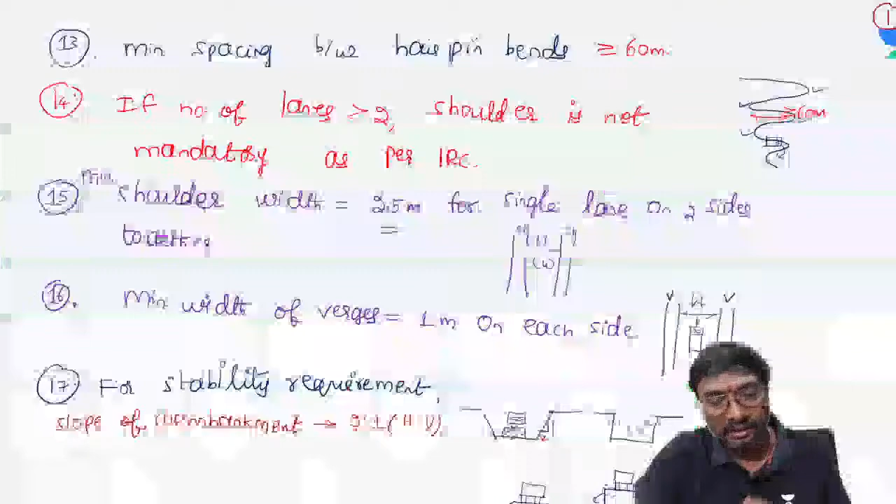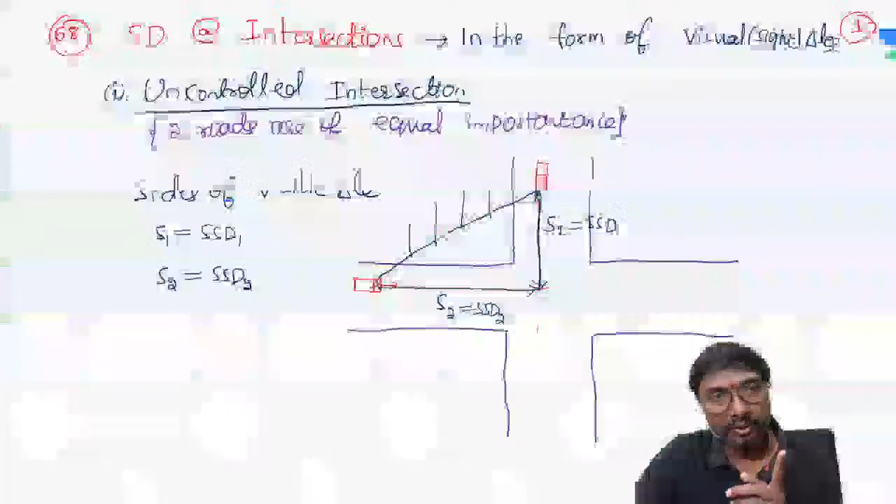So these are all completed now, the geometric design of the cross-sectional elements and everything. Which one? These highway visual aids, right? Geometric design of highways: stopping sight distance, chapter 2, is over. Chapter 3, overtaking sight distance, over. Chapter 4, visual aids, also over. If you just observe, these are all the things. Chapter 4, intersections, visual aids, and the occlusion zone, we have done.

Right. So today we'll be starting chapter 5. Lecture 7 of the quick revision of highway engineering, that is horizontal alignment part 1. So chapter 5, horizontal alignment, horizontal curves. Horizontal alignment means these are located in a horizontal manner only, yes or no?

Is the alignment located in the horizontal plane or the vertical plane? The alignment is located in the horizontal plane, obviously. Now we'll be going for horizontal alignment. First we'll be going for horizontal curves with superelevation.

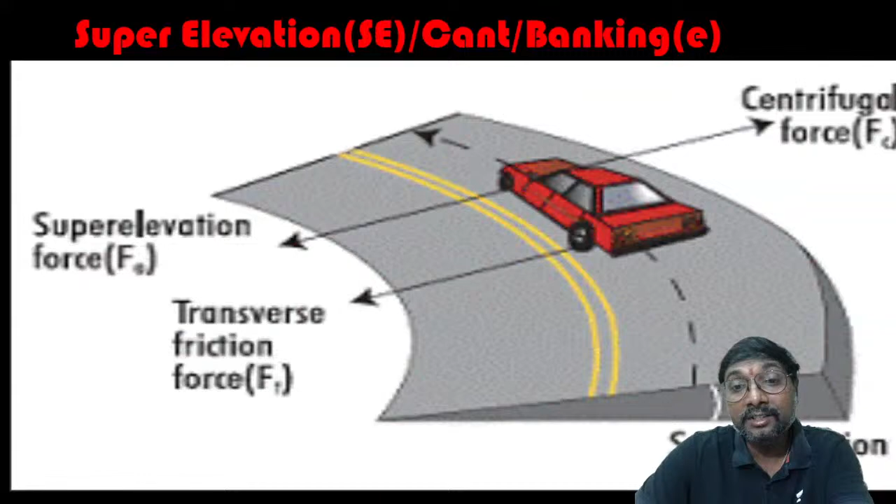How many formulas are over? The 75th formula is over now. Now we'll be starting with the 76th formula. So 76th: the condition of a vehicle on a horizontal curve. What is possible? Tell me.

Condition of vehicle on which curve? Condition of vehicle on this horizontal curve, right? Suppose P by W. What is that P by W? You can say that P by W is nothing but your centrifugal ratio. Yes or no? P by W is nothing but your centrifugal ratio, if you just observe, right?

So the centrifugal ratio, or you can also call it as which one? This impact factor. Centrifugal ratio, or you can also call it the impact factor, right? Centrifugal ratio means the ratio of the centrifugal force and the weight of the vehicle. If P by W is greater than F, which friction you will be having? Lateral friction only you will be having.

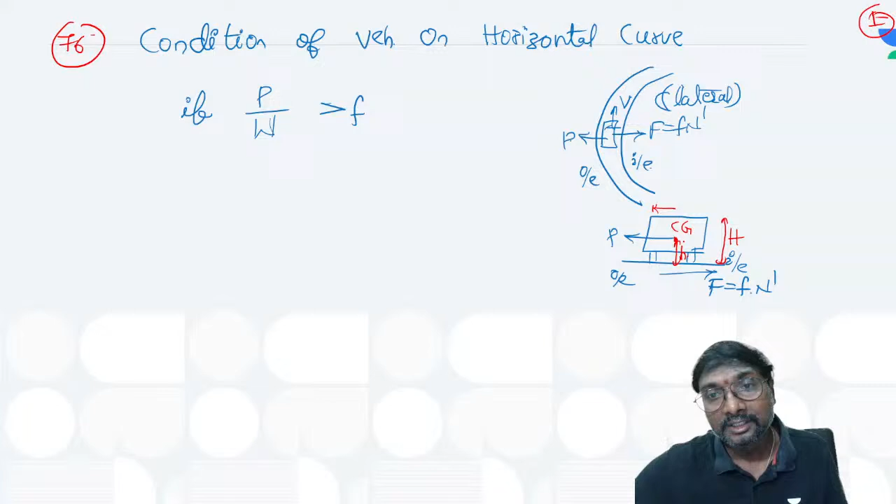Now what is this value? This is your capital H, total height of the vehicle, and this is the CG of the vehicle. This is your small h, the CG height. And small b will be your width of the vehicle.

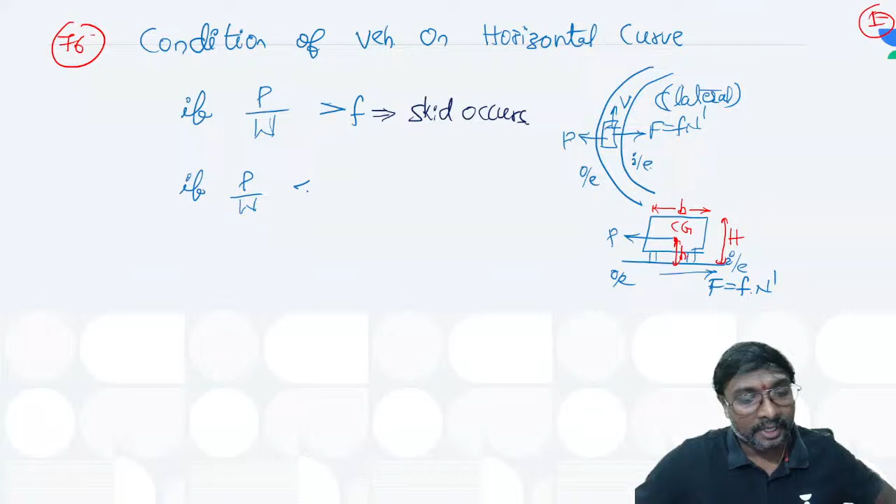If the P by W effect is greater than F, the effect is higher and the resistance is lesser. What will happen? Skid occurs definitely, unsafe. Similarly, if P by W is lesser than F, it is safe in skid. Which skid? Obviously, this is your lateral skid. On the horizontal curve, the skid is a lateral skid only; there is no longitudinal skid.

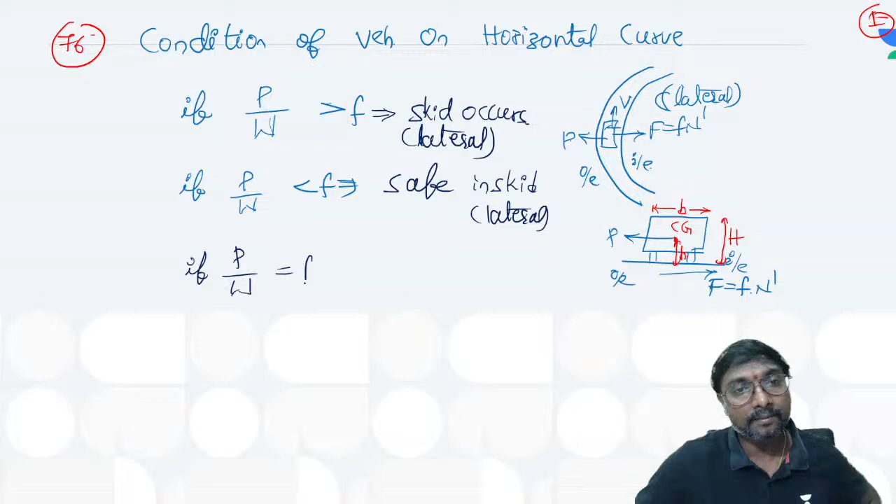Now, suppose P by W is equal to F. What is it, you can say? This is in the equilibrium condition, if you just observe. Now, this is with respect to the condition of vehicle on curve with respect to skid.

Now, similarly, what is another condition of the vehicle that will happen? Tell me. What is another condition of vehicle?

H curve means it is your horizontal curve only. So which parameter will we be taking? Overturning, not overtaking. Lateral skidding and this overturning rate, both parameters will be there. Yes, we have to check both the parameters, right?

Suppose P by W is greater than b by 2h, lesser than b by 2h, and equal to it. We have to check these three conditions definitely. If P by W is greater than b by 2h, what can you say? Overturning occurs or it is safe in overturning, tell me.

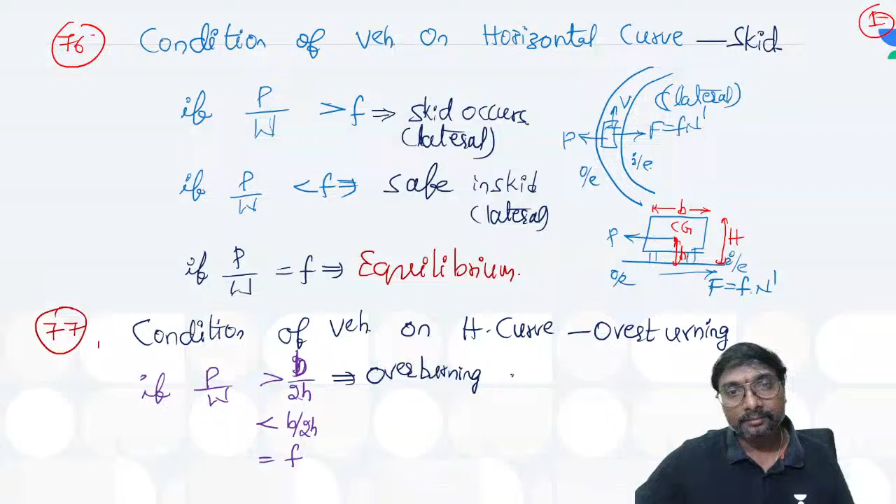Overturning occurs, right? If P by W is lesser than b by 2h, what can you say? It is safe in overturning, right? Now if P by W is equal to b by 2h, under which condition is it? It is under the equilibrium condition, you can say. Got it?

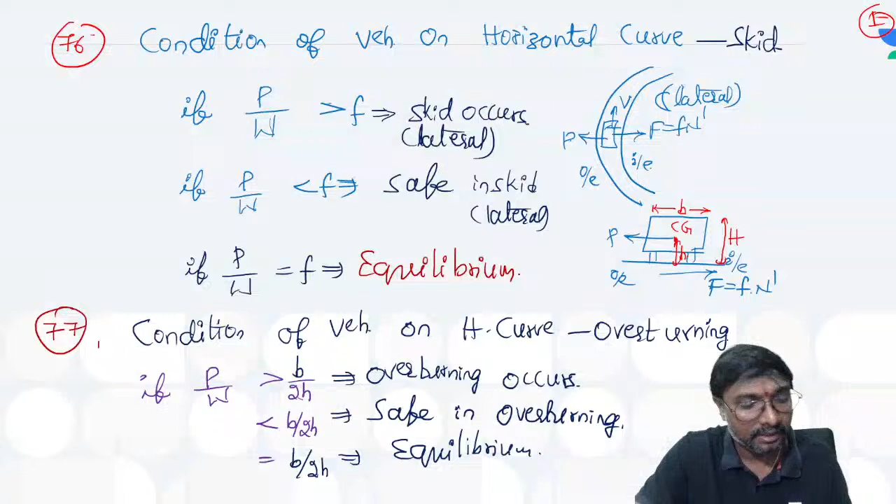So what is the meaning of equilibrium? Equilibrium means exactly neither failure nor safe condition. If the effect is slightly greater, it will go to the unsafe condition. If the resistance is slightly greater, it will shift to the safe condition. Is it clear, everyone? Shall I move to the next one?

Not only individual effects, we can have the combined effect also. So what is that combined effect? If P by W is greater than f and lesser than B by 2H, which condition will occur? Only skid occurs, you can say.

Suppose P by W is lesser than f and greater than B by 2H, what will happen? Lesser than f means the frictional resistance is higher, so no sliding or skidding will occur. But the B by 2H resistance is lesser and the effect is higher. So only overturning occurs, right?

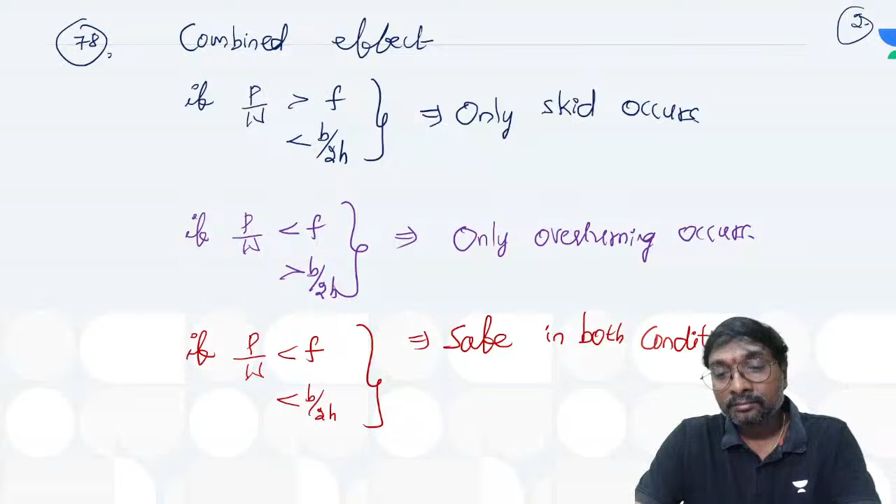Suppose P by W is lesser than f and lesser than B by 2H, what can you say? It is safe in both conditions, overturning as well as skidding. Absolutely, right? Got it? Clear?

But is it compulsory that it will always be safe in both conditions? Sometimes it may not be. Now in this condition, P by W is greater than f and greater than B by 2H. Which failure will occur? Both will occur. So is it safe in both or unsafe in both? It is unsafe in both conditions, you can say.

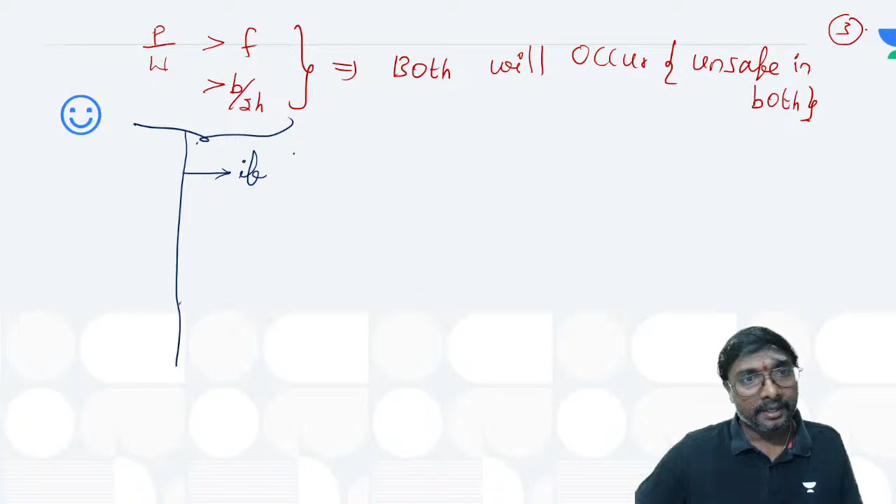But which one will occur first and which second? Under this there are three possibilities. The first possibility: if small f is lesser than B by 2H, what will happen? It skids first and then overturns.

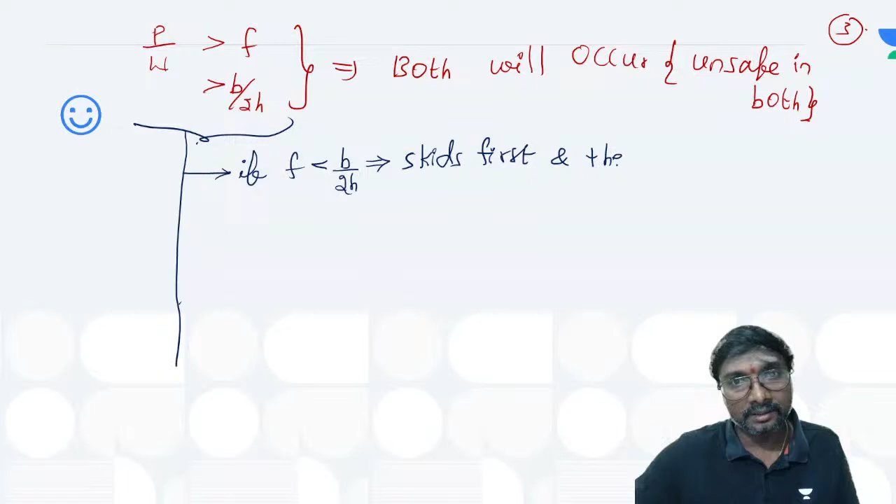So skids first and then overturns, you can say, right? Skids first and then overturns, right? Why will it skid first? Bhale Babu of engineering.

So here, f is lesser than b by 2h, lesser than p by w, no? Is it or no? So the effect is very much higher, so that both will occur.

But that skidding resistance is very much lesser compared to the overturning resistance. So it will be subjected to failure in which condition first? It is weaker in both and much more weaker in the sliding, because the skidding resistance is much more lesser, very much lesser. It is weaker in both and weakest in the skidding. Got it? Now if f is greater than b by 2h,

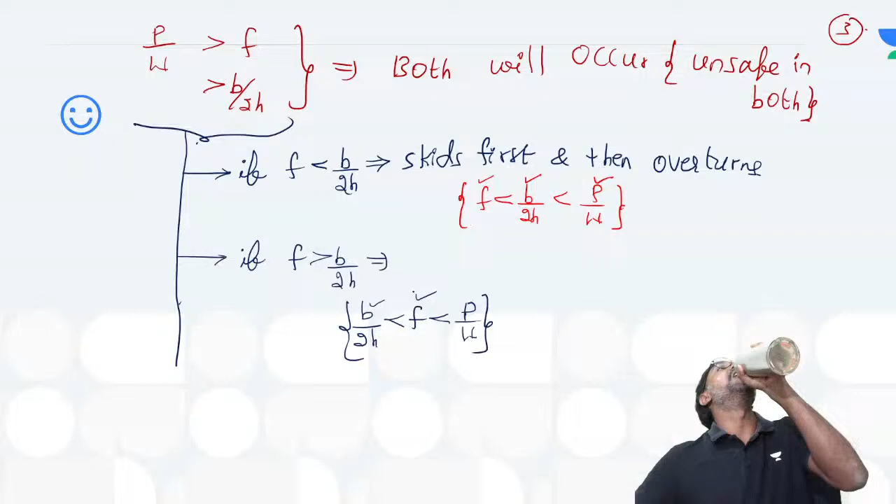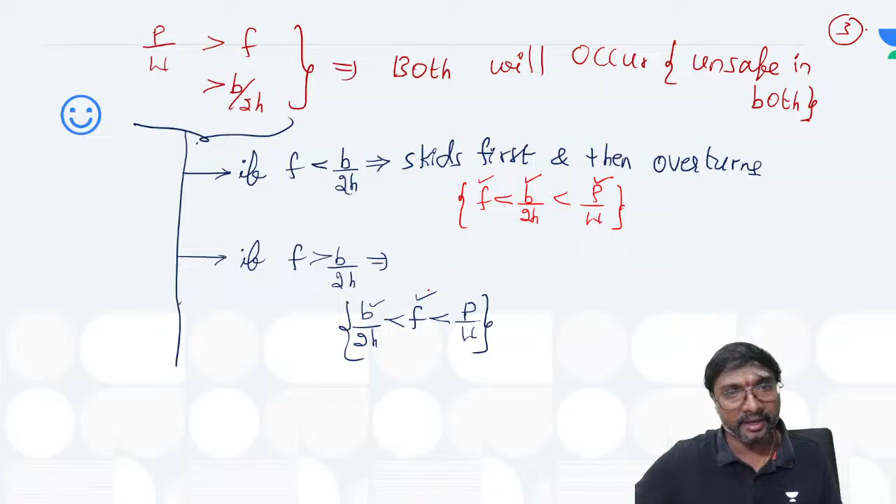It is weaker in both, but weakest in which one? Much more weaker or weakest in which one? Overturning, because that resistance is further lesser. So it overturns first and then skids, na? What will happen first, if you just observe? It will be subjected to overturning first. So no, it overturns first and then skids. Okay.

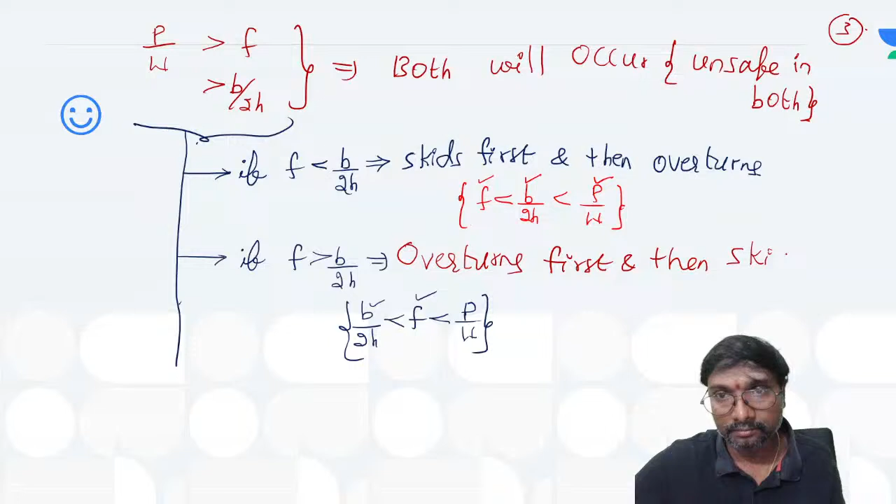Suppose under these conditions, if f equal to b by 2h, what is it you can say? That f equal to b by 2h, but both will be lesser than p by w effect. Now what will it result in, if you just say? Simultaneous failure, na? So it occurs simultaneously.

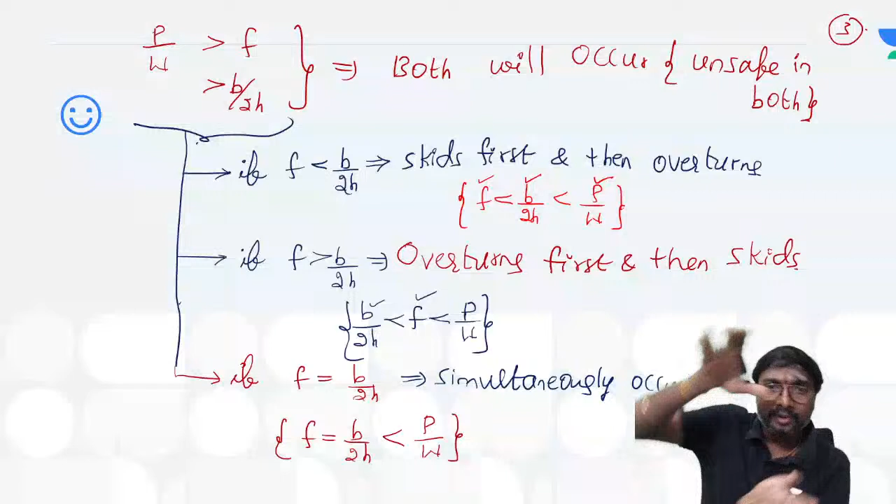Right, now tell me, among all of them, which one are practically possible and which one are theoretically possible? The first one, skids first and then overturns, means your vehicle will be skidding. During this skidding, vehicle velocity will be there, and because it is in contact with the road moving, so after that overturning it is practically possible. But once overturning occurs, you don't have any contact of this vehicle with the pavement, so no motion, no velocity is there, further skidding is not possible. Okay, is this practically possible or not?

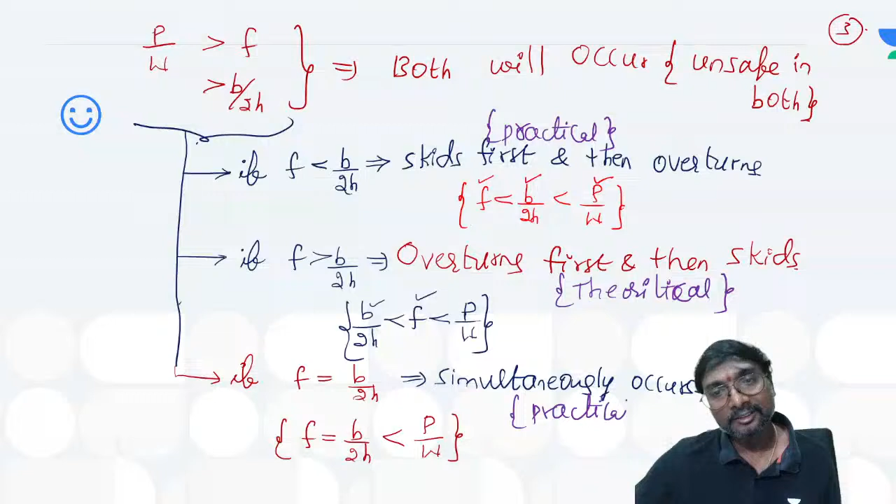Yes, this is practical, you can say. But this second one is only theoretical, you can say, right? But practically not possible. Okay. Next, this third one, right? You can say that the third one is practical, na? Isn't it? Third one is practical, you can say. We just observed it, isn't it?

Got it? Yes, now. So shall we move on to the next one? This is the condition we are having. Which equation is it? 77th point, or 78th point, na? No. Coming to this 79th point, right? What is that general equation of this super elevation, if you just observe?

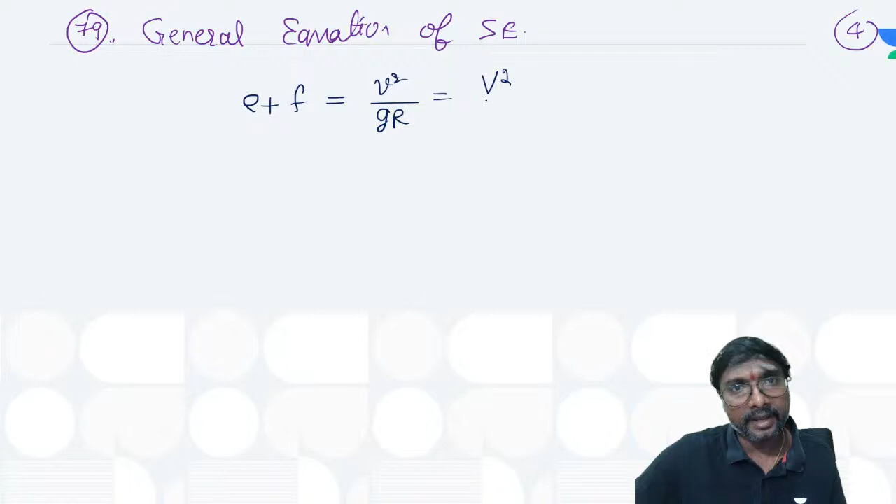So what is that general equation of this super elevation, if you just observe? That is your E plus F will be equal to, what is it you can say? That is small v square by GR, that is also equal to capital V square by 127R, na? That is small v square by GR, or capital V square by 127R, you can say, right?

So here, what is that G? It is in meters per second square, acceleration due to gravity, na? And R is the radius of this horizontal curve in meters, and small v is velocity of the vehicular design speed in meters per second, R will be in meters, and capital V, you can say, that is in kilometers per hour. So now that is your kilometers per hour, you can say, if you just observe, right? Is it not?

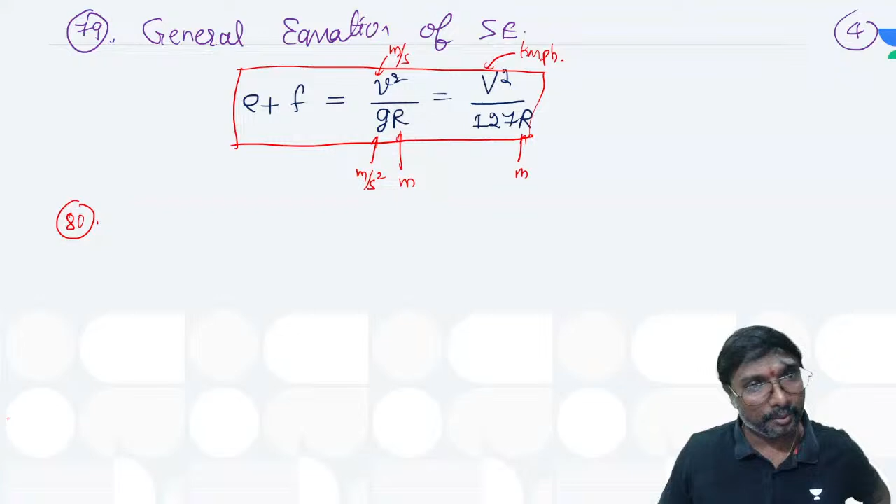That is the general equation we will be having. So now that is your general equation. First of all, what is the definition of this super elevation?

Super elevation, SE. You can also call it with which name? Banking - not state banking, online banking, offline banking, not banking like this. It is providing a bank, right? Banking or cant, you can say. What is the symbol we are giving for this banking or this cant?

Small e. So what is that small e? If you just observe, that is your tan theta, right? What is tan theta? Capital E divided by capital B, right? What is capital E? Level difference between the outer edge and inner edge. What is capital B? Width of this pavement, right?

Whenever you are having this road like this, let us say just for an example, centrifugal force P is provided in this manner, and this is your outer edge and this is your inner edge.

What is this level difference? That is your capital E. If you just observe it, this is your B, width of this pavement, right? This is your theta, you can say. And this is your vehicle running. So B is the width of this pavement, and capital E will be level difference between this outer edge and inner edge.

Yeah, Deepak, good morning. After long time, Deepak Pandey.

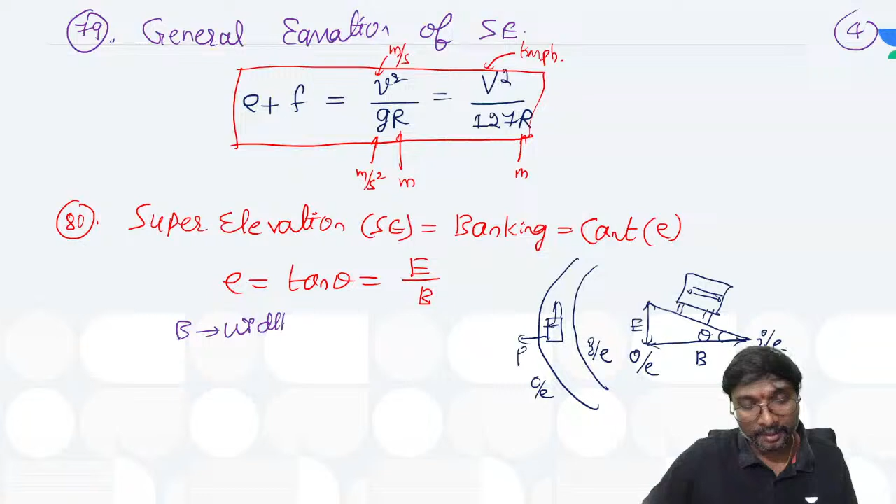So here what is capital B? You can say, if you just observe, width of this pavement where? Width of pavement on which curve?

If you just observe, yes, I am good. How are you?

Width of pavement on this horizontal curve. What is capital E? You can say that the capital E will be the level difference. Level difference between which one? Outer edge and this inner edge. Level difference between this outer edge and this inner edge, you can say, right? Got it? This is what you are having.

Whenever angle is given, how can you get that angle? Both acha hai, very good, very good. Keep it up.

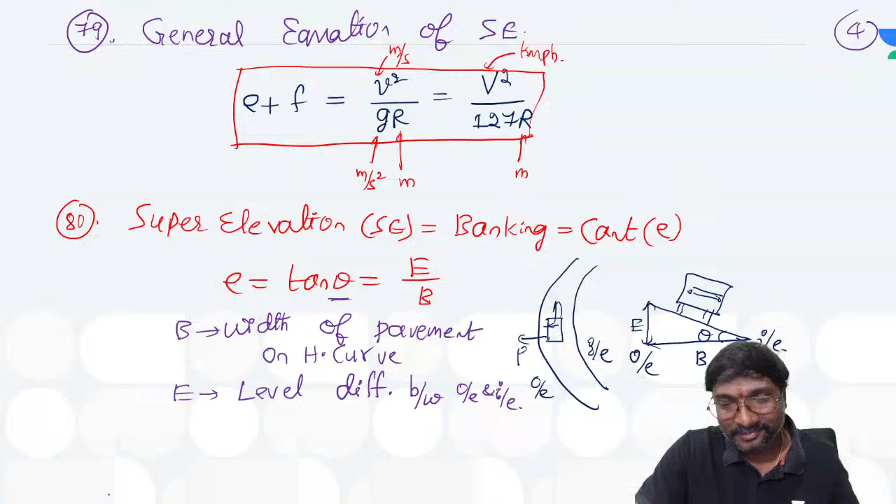Still, I remember the day when Deb and you called me, yes or no, together - that video call you made, right? On that day, 2 years back. Right, here. Pavan Kumar, good morning. Right. IT. After gate results. You remember?

This is IT 1. So now if you just observe, whenever it is, that is a generalized equation of your super elevation, you can say, right? And this is which one? You can say super elevation for this mixed traffic.

Whenever it is a super elevation for this mixed traffic, if you just observe it, what is the super elevation for this mixed traffic, you can get it. You can say that mixed traffic means that only which one is there? Only fast moving vehicles, or only slow moving vehicles, or a combination of both fast moving as well as slow moving will be there. Mixed traffic means, what is the meaning of this mixed traffic? Tell me everyone. Both the fast moving as well as this slow moving vehicles will be there.

So now these slow moving vehicles, whenever they are traveling, will they allow other vehicles to travel with higher speed, or will they not allow the other vehicles to travel with higher speed? They will not allow the other vehicles to travel with higher speed, if you just observe, right? Isn't it?

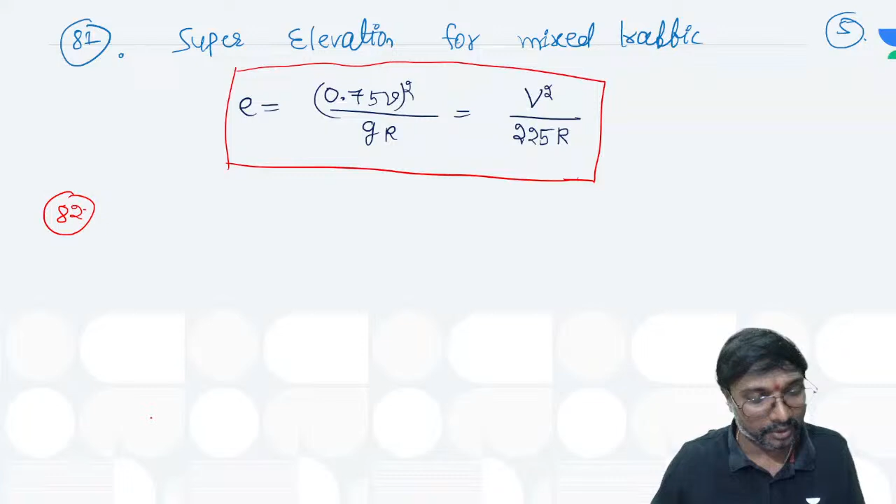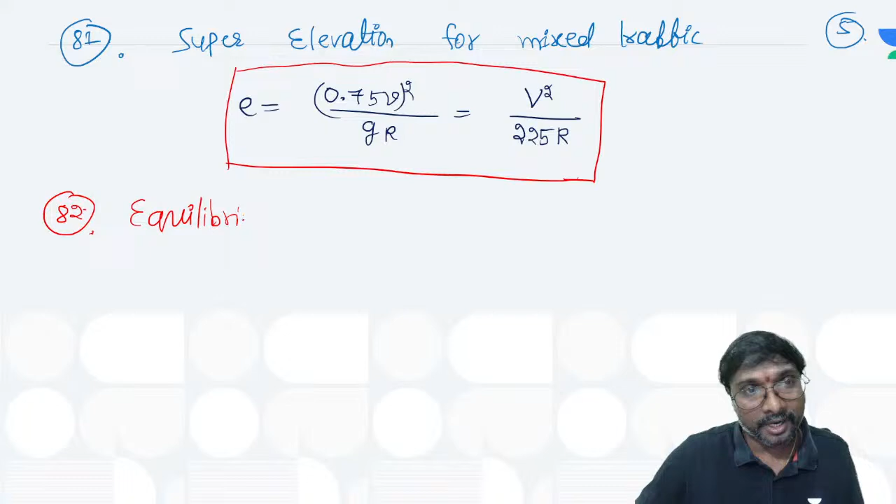Now, whenever it is mentioned as equilibrium, what is that you can say? Equilibrium super elevation, or you can also characterize it as balanced super elevation, no? Equilibrium super elevation or this balanced super elevation, it is which one? This is a hands free condition, you can say.

Whenever you go for this hands free condition, at what is it you can say? If you just observe, that is your E equilibrium or this E balance will be equal to which one? Same, that is simply V square by GR, or capital V square by 127R. So for this equilibrium super elevation or balanced super elevation, what does it tell me?

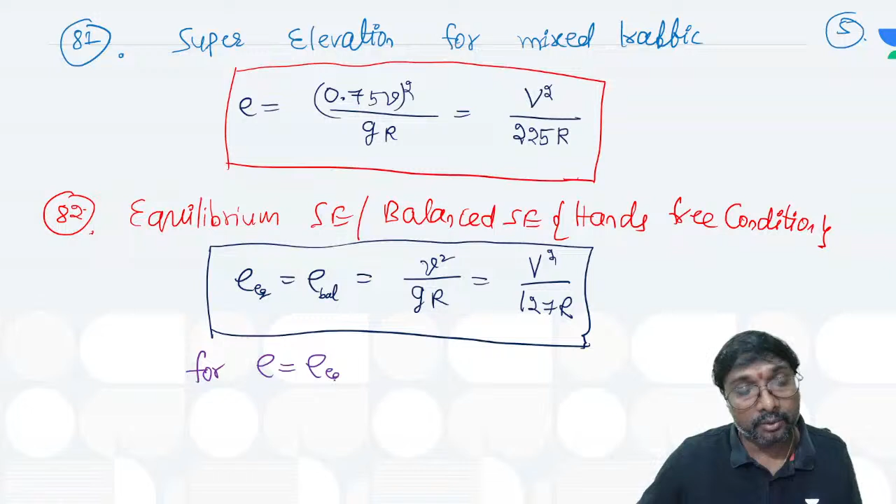For this super elevation equal to equilibrium super elevation or balanced super elevation, what conditions will occur? Tell me if you just observe. Hands free conditions will occur, right? What is the meaning of this hands free condition?

You can say hands free condition is nothing but pressure on inner wheel. No need to use the pressure on inner wheel. Pressure on inner wheel is equal to pressure on outer wheel. Pressure or load or reaction, right? You can use any one. Pressure on the inner wheel, pressure, load, or reaction is equal to pressure, load, or reaction on outer wheel.

So whenever this pressure and reaction are balanced, hands free condition means do you need to steer the vehicle or no need to steer the vehicle? No need to steer the vehicle. No need to steer vehicle means what will happen? Vehicle takes turn automatically, no?

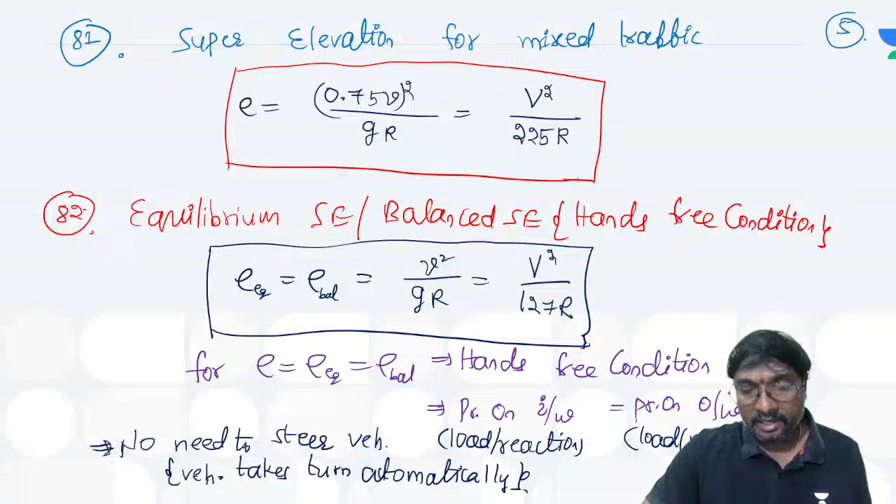Now, we'll be going for the next one, right? What is the point number? 82. This is 83. We can go for it.

Now, what is that? Maximum allowable speed, without any super elevation, right? Without any super elevation means only friction is present. That super elevation is not present means that only friction will be present, you can say, if you just observe, right?

So means E plus F equal to V square by GR, right? Or capital V square by 127R. Now coming to this state, what will happen?

That super elevation is 0 means, so whenever the speed increases, F increases. But are we okay to increase the friction beyond F maximum? No.

So therefore we have to restrict the speed to VA, right? So what is the VA allowable speed? Small VA will be equal to under root F maximum into G into R. And what is the capital VA? You can say under root 127 into F maximum into R, you can say, if you just read, that is what.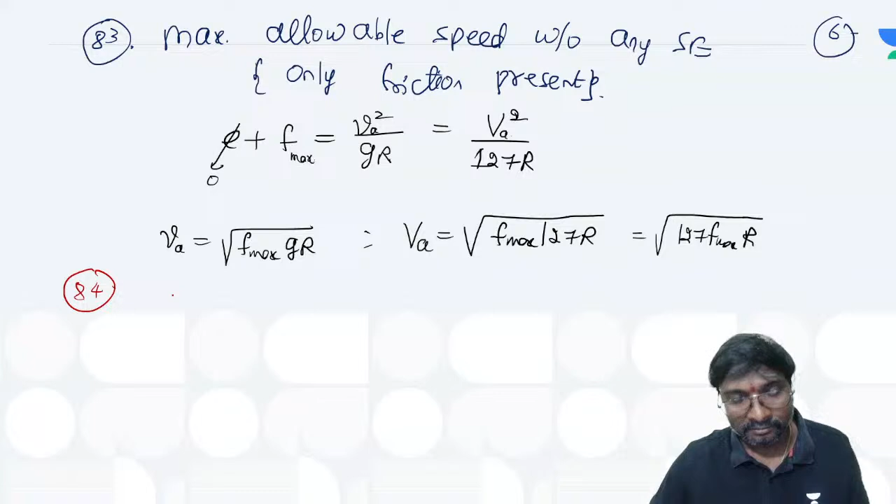Got it? So is it okay to provide any value of super elevation, or is it not okay to provide any value of super elevation? What is that minimum value of super elevation? You can say limits of super elevation, right?

Okay, what is it? You can say limits of super elevation. The first and foremost limit, right? Whenever it is a maximum limit or minimum limit, what is the minimum value of this super elevation? You can say minimum value of this super elevation is nothing but your camber, na?

Camber. What is the purpose of this one? It is with respect to the drainage point of view, to take care of drainage, right? What is the concept? We just observe. We have to provide super elevation equal to the camber.

Now, super elevation, what is it? Super elevation should not be greater than the maximum limits. For which purpose? As per IRC, super elevation should not be greater than this E maximum. As per IRC, it is mainly to avoid what? It is mainly to avoid toppling. Okay.

Mainly to avoid the toppling or turning of which one? Toppling or turning of slow moving vehicles. In which condition? In mixed traffic conditions. Toppling or turning of vehicles in mixed traffic conditions, right? Clear? In the next slide I will be writing the maximum limits of super elevation we have to take under different conditions. Okay.

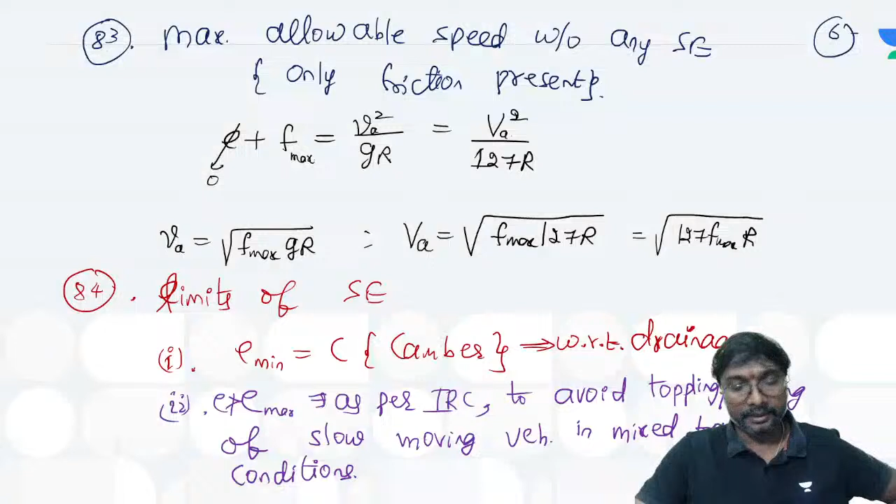Done with this one. Written. Okay, actually I thought these slides would be sufficient. One sec. Four more slides we have to add for this. Right. This is the 84th point.

So what are the E maximum limits for these various conditions? First one, whenever it is an urban road, what is the value of E maximum? We have to go for 4%, right? Second one, whenever it is a plain and rolling terrain, what is the E maximum? 7%.

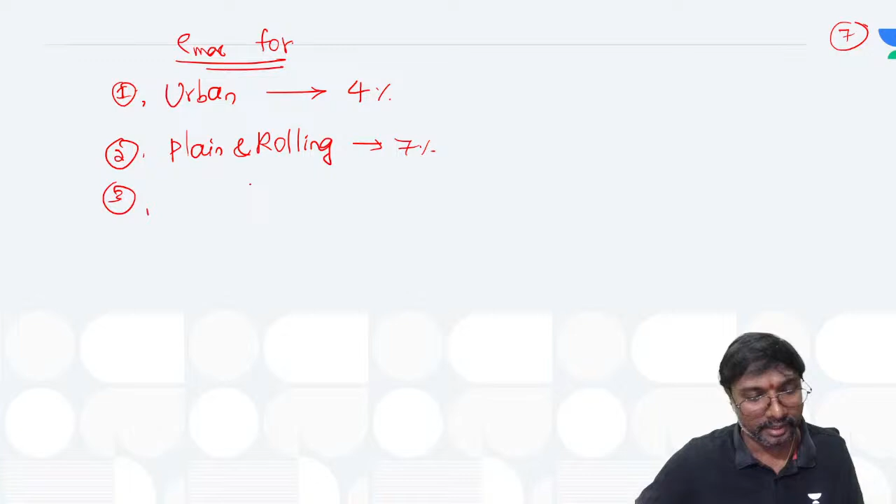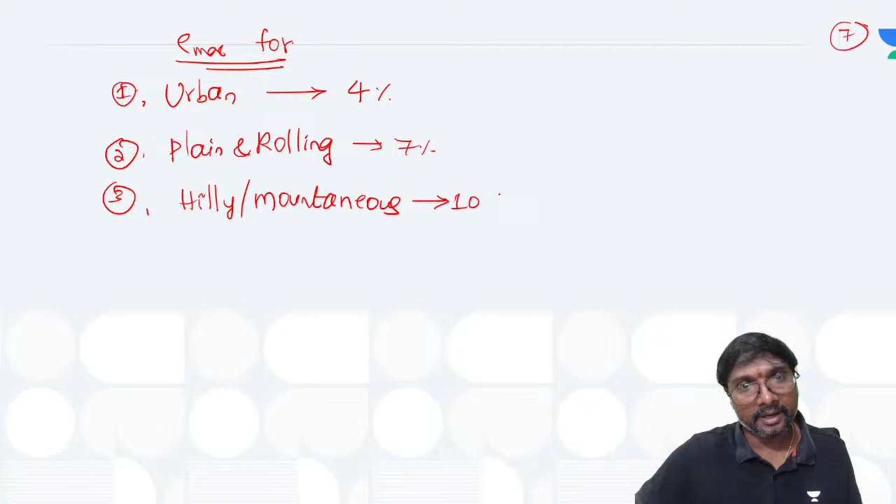And the third one, if you observe, is hilly or mountainous terrain. In case of hilly or mountainous terrain, it is 10%, right? Now, whenever it is a hilly terrain with snowbound, it is again 7% we have to consider.

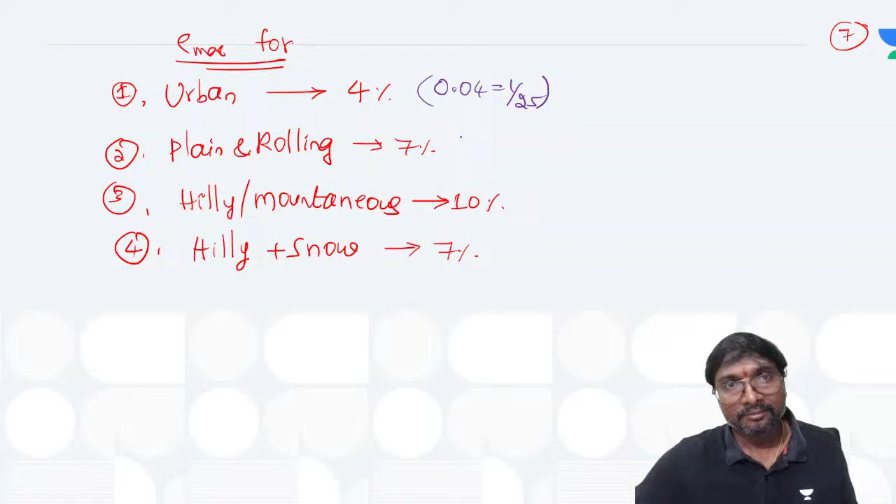4% means what? 0.04 is equal to 1 in 25. 0.07 is equal to 1 in 15 approximately. 10% means 0.1, equal to 1 in 10. So 7% means 0.07, equal to 1 in 15. Got it? Clear?

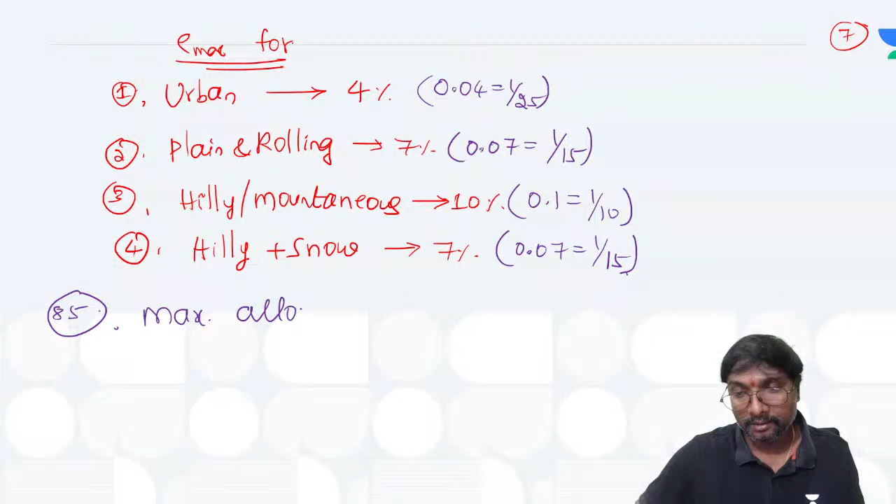Right. So now whenever you are going for designs, what is the maximum allowable speed? Maximum allowable speed for conditions with super elevation not greater than E maximum and friction not greater than F maximum. What is it? E max plus F max equals what?

If you observe, it is va square by gR, equal to capital Va square by 127R. Then what is small va or capital Va? Small va, the allowable speed in meters per second, is the square root of g into R into E max plus F max. And capital Va will be equal to the square root of 127 into R into E maximum plus F maximum. This is how we are getting it.

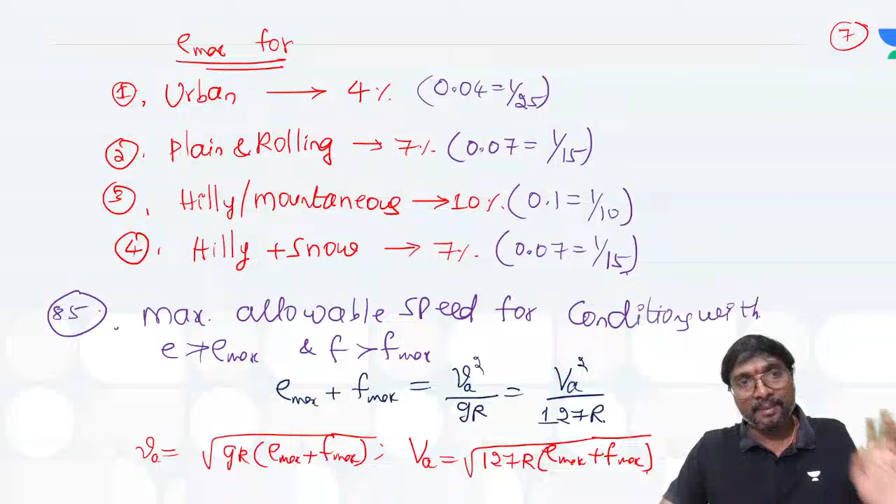Under which conditions? Super elevation is provided, friction is provided, and these are not supposed to exceed the maximum limits. Under this condition, maximum speed limit. Somewhere we have written a speed limit under which condition? Point 83: no super elevation is there, only friction. Here super elevation and friction both are there. Clear?

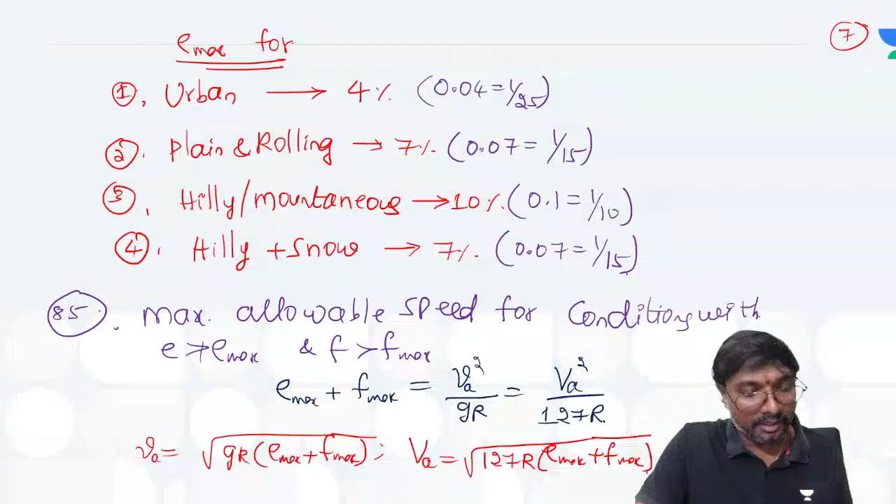Shall I move to the next point, the 86th point? We'll be going for the 86th point, everyone. Right. So here, what is the ruling minimum radius, if you observe?

Ruling minimum radius, right? What is that ruling minimum radius? R ruling minimum, right? Tell me. That is your small v square divided by g into (e max plus f max), equal to capital V square divided by 127 into (e max plus f max). Okay, like that we can get it, right?

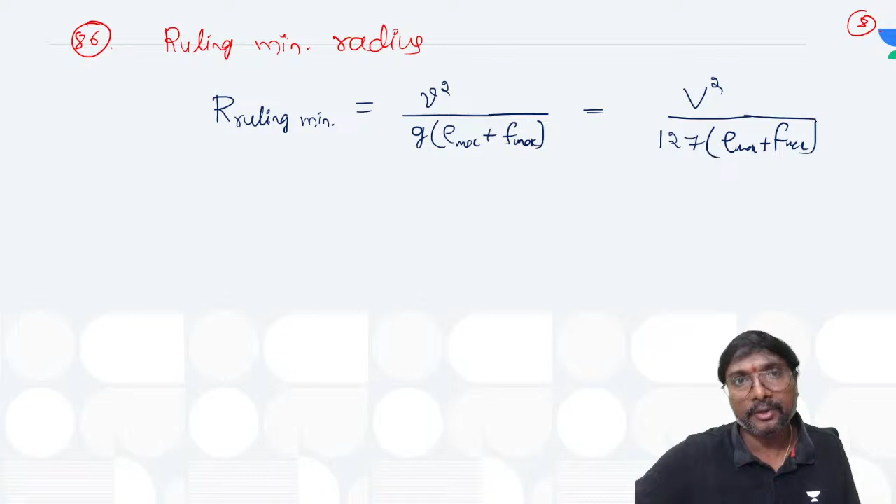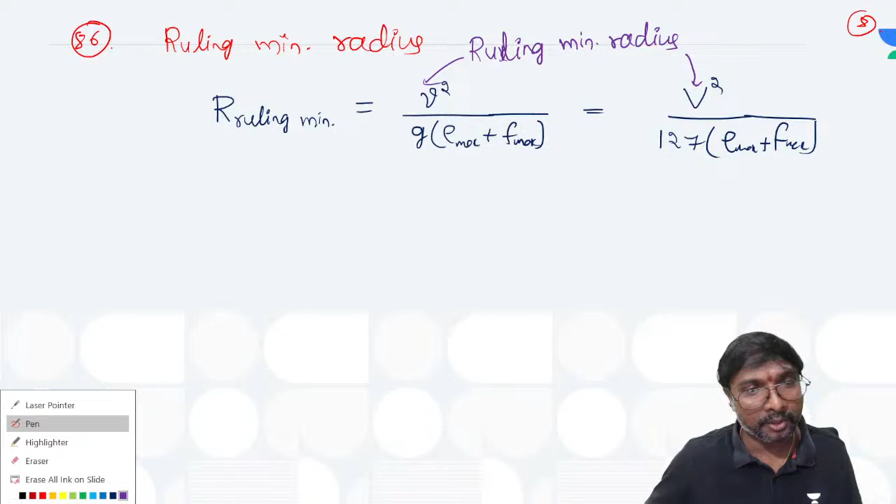So if you wanted to get this ruling minimum radius, what is the speed we have to substitute? Sorry, the speed must be the ruling design speed. Whenever you are going for this ruling design speed, the radius will be the ruling minimum radius, right? Ruling design speed you have to use to get this ruling minimum radius. Got it? Similarly, what is the next one?

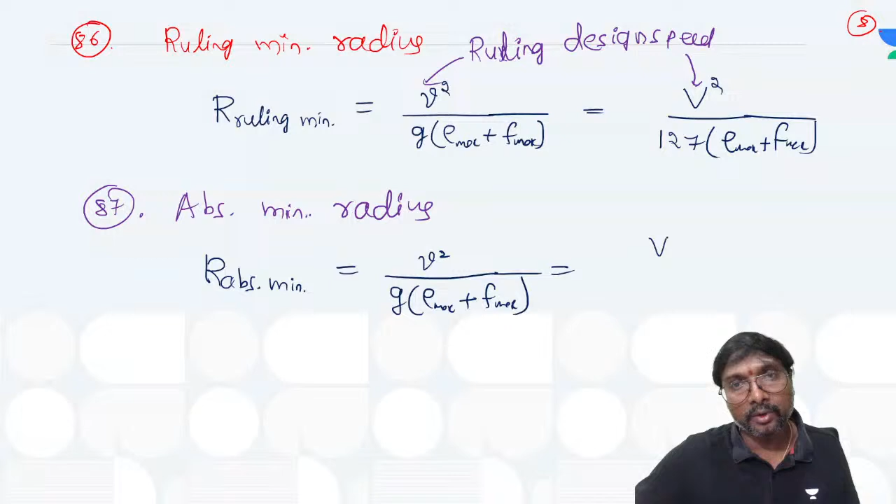Absolute minimum radius, right? What is that absolute minimum radius? R absolute minimum will be equal to the same small v square by g into (e max plus f max), or capital V square by the same equation. Is there any difference in the equation? There is no difference in the equation, right? 127 into e max plus f max.

So what is the speed we have to substitute to get this absolute minimum radius? Minimum design speed we have to substitute. There are two design speeds. Do you remember what the two design speeds are? Ruling design speed, the 98th percentile value, and minimum design speed, lesser than that, right? Got it?

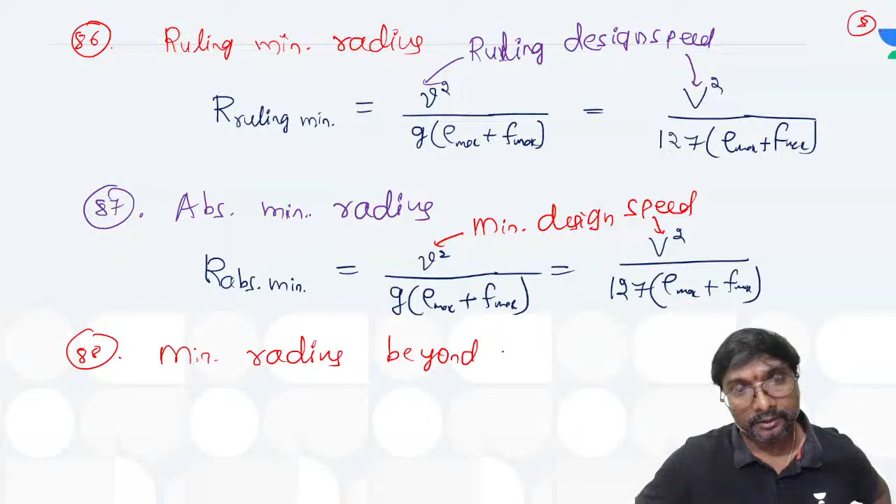Now here, minimum radius beyond which no super elevation is required. Means if you provide this radius, super elevation is not required. But when super elevation is not provided, camber must be there; definitely camber will serve the purpose of super elevation, right?

So what is that R minimum you have to go for then? That R minimum we have to take as 0.75 into small v whole square divided by g into capital C, or capital V square by 225 C. What is the C value? C is nothing but your camber.

It is not 98th percentile, so it is different for different conditions, right? That is why there is no value given. Ruling design speed will be your 98th percentile speed only, but minimum design speed need not be. Here in point 88, only camber is provided and no super elevation. Camber will be serving the purpose of the super elevation, right?

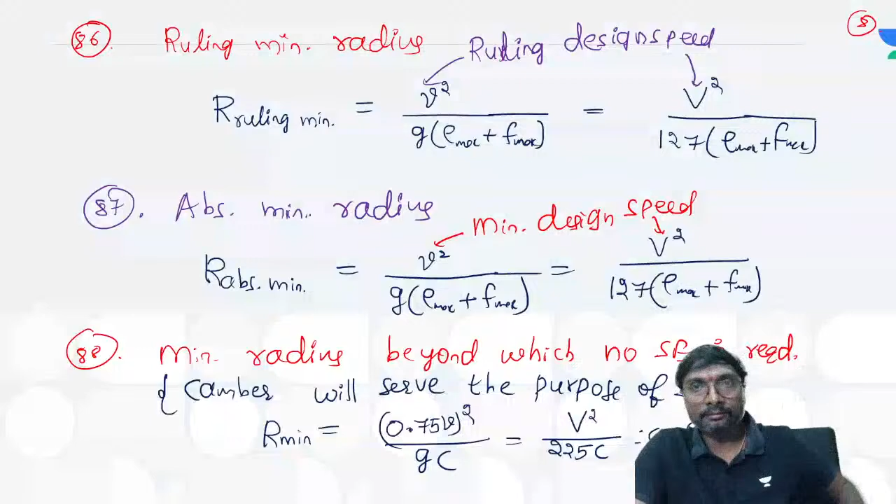Why is camber provided? To take care of drainage. Even though super elevation is not required, camber is a must, definitely. Is camber 100% compulsory or not? Yes, absolutely. Okay, note this. Is this clear, everyone? Point 88.

89th point, right? What is that P by W? You can say centrifugal ratio. Centrifugal ratio, or you can also call it the impact factor, if you just observe, right?

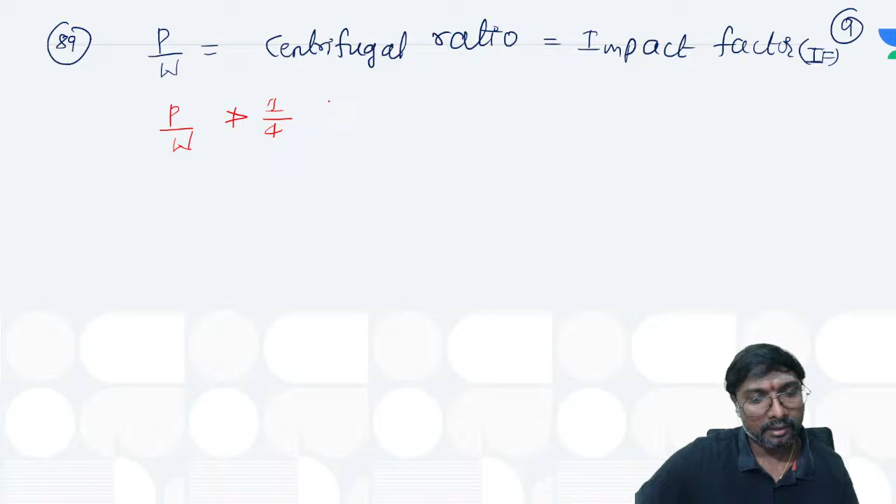So is it better we should have a higher value of this centrifugal ratio or a lesser value? It is better we should have a lesser centrifugal ratio. P by W should not be greater than 1/4 for highway horizontal curves.

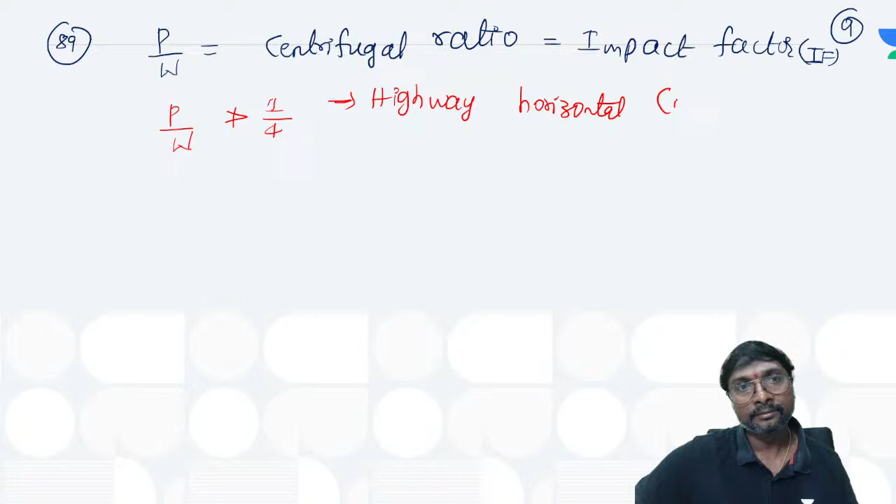Highway horizontal curves means it is road related. It should not be greater than 1 by 4 for highway horizontal curves, right? And 1 by 8 is for which one? Railway horizontal curves. For railway horizontal curves, it should not be greater than 1 by 8, right?

Now, there are different methods of attainment of the super elevation. Suppose the rotation is with respect to the inner edge, what is the rise of outer edge? The rise of outer edge, capital E, will be equal to small e into capital B, okay?

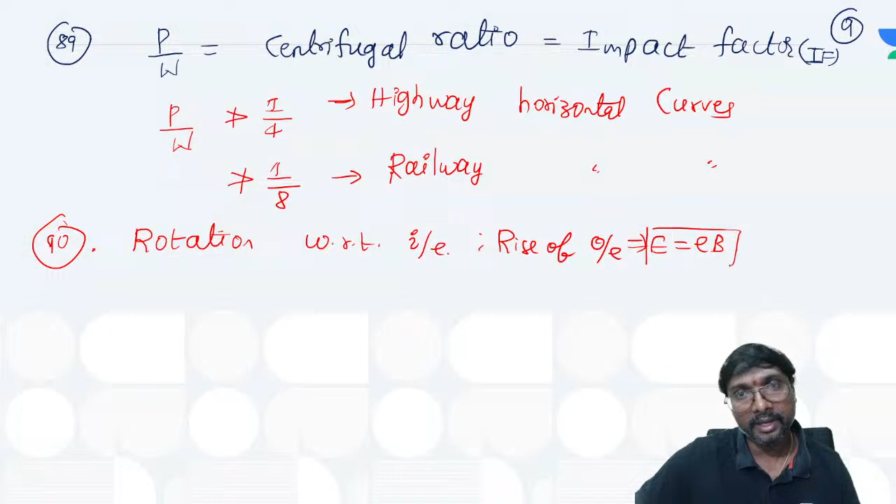Now, whenever rotation is with respect to the outer edge, is it a rise of outer edge or a fall of inner edge? It is a fall of inner edge, right? Only the inner edge will be falling. Capital E will be equal to small e into B only. Got it?

Now, when rotation is with respect to the center line, both rise and fall will take place. Rise of outer edge equals fall of inner edge, which is capital E by 2. Capital E by 2 is nothing but small e into capital B by 2, right? Got it? Clear? So once these are over, we'll move on to the next one.

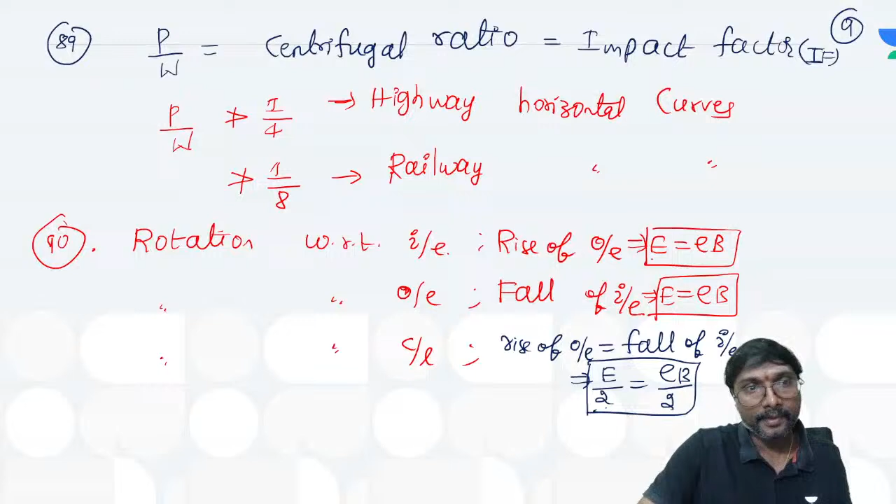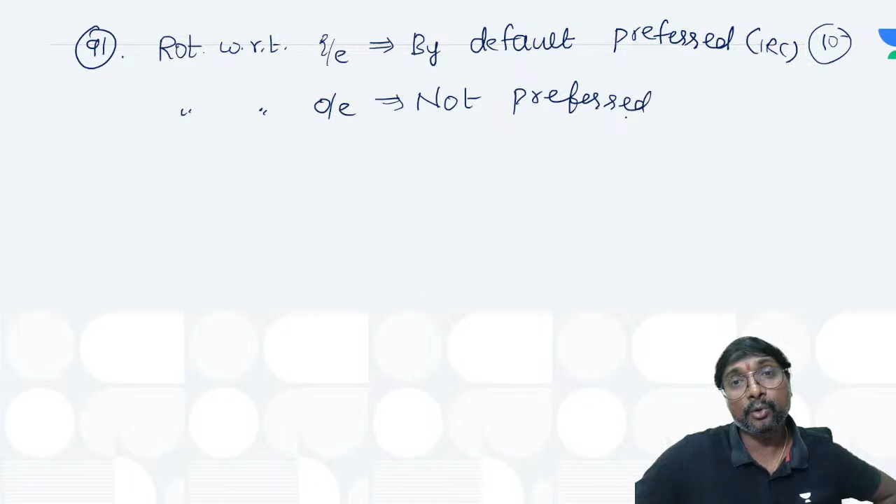This is the 10th slide, 91st point. Rotation with respect to inner edge is preferred by default; it is the default method. Now, is rotation with respect to outer edge preferred as per IRC? It is not preferred, right? Why? Due to the drainage problem, this method is not preferred.

Now, rotation with respect to center line, is this preferred in general or not preferred in general? This is also not preferred in general. Rotation with respect to outer edge is not preferred at all, but rotation with respect to center line is not preferred in general, meaning in some specific conditions it can be preferred.

Now, when is it preferred? When economy is required. What is the economy? The length of the transition curve will be lesser, and balancing of earthwork happens. Within this lesser length of transition curve itself, we can introduce the full super elevation. Got it now? Is it clear?

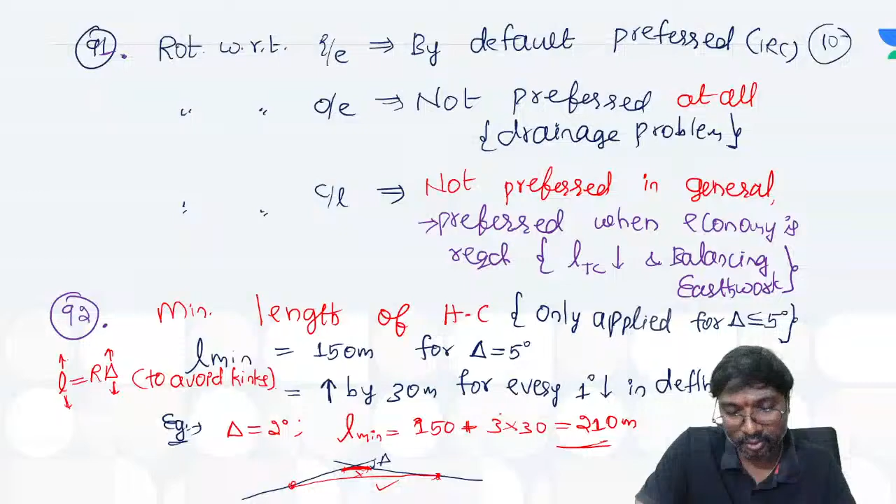You are facing a lot of net issues. Okay, no problem. Clear now? Shall I move to point 93?

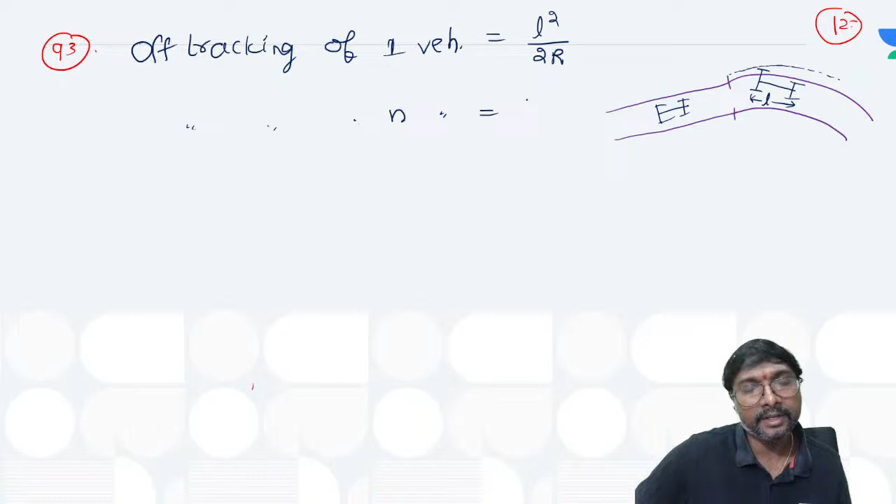What is the meaning of off tracking? Moving outside. Let us consider L is the length of the vehicle. Off tracking of one vehicle is equal to L square by 2R. Now off tracking of N vehicles will be NL square by 2R.

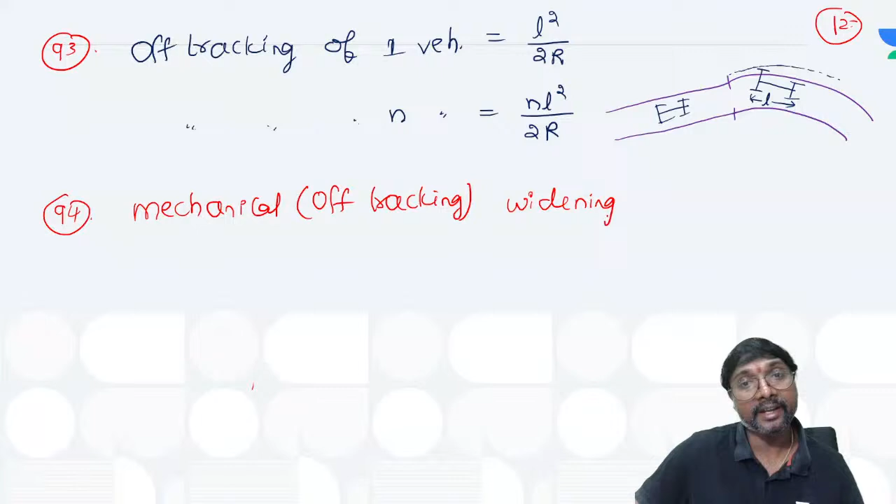So to take care of this, what is the mechanical widening? Mechanical or off tracking widening is to take care of this off tracking effect. So the off tracking widening, WM, is the same as the off tracking: NL square by 2R. This is for how many lanes?

This is for this n number of lanes. Whenever there is an n-lane carriageway, this is how we have to go. Wm is in meters. What is L? You have to substitute it in meters. L is nothing but the length of the wheelbase, or length of the vehicle.

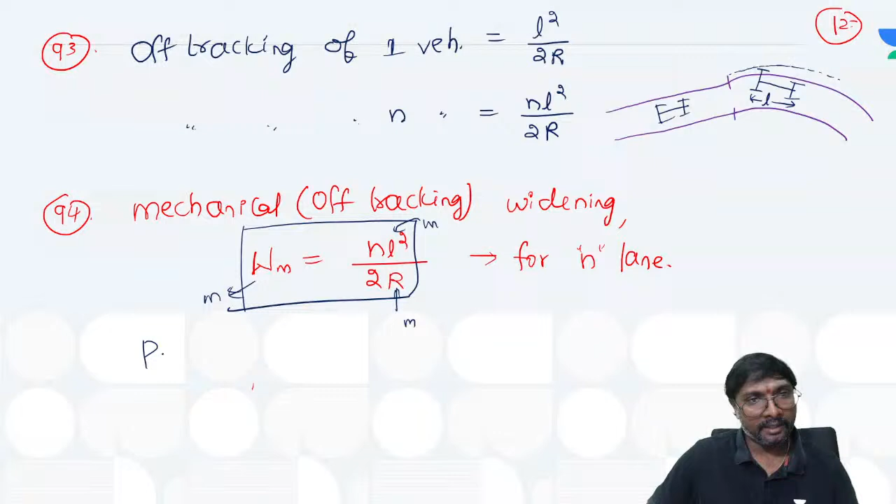Now, psychological widening. What is the psychological widening? Wps will be equal to capital V by 9.5 root R. Or approximately you can take it as 0.1 capital V by root R.

Now Wps will be in meters. R you have to substitute in which units? Radius of the horizontal curve in meters. Capital V, the design speed, we have to substitute in kmph. So this is for which one? For any number of lanes.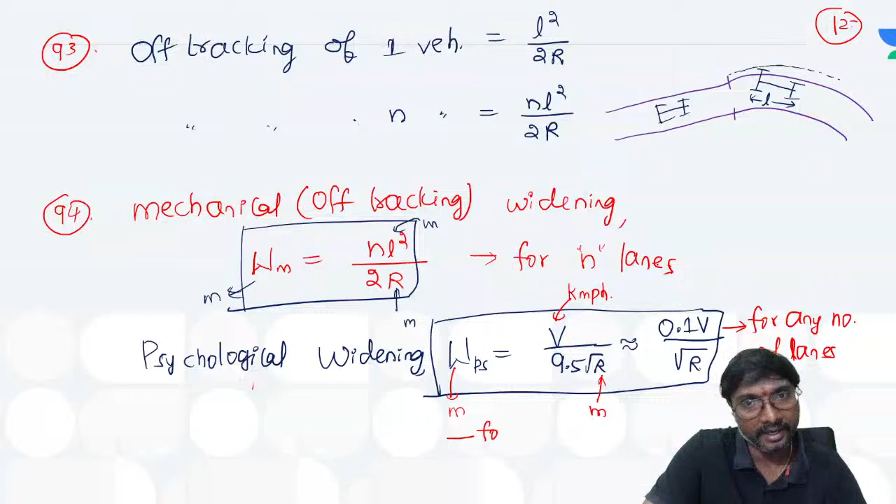Whether it is a single lane, 2 lane, 4 lane, 5 lane, however many lanes there are, it is like this only. So can we go for multiplication with n? No, we don't go for multiplication with n here. Clear? This is for any number of lanes.

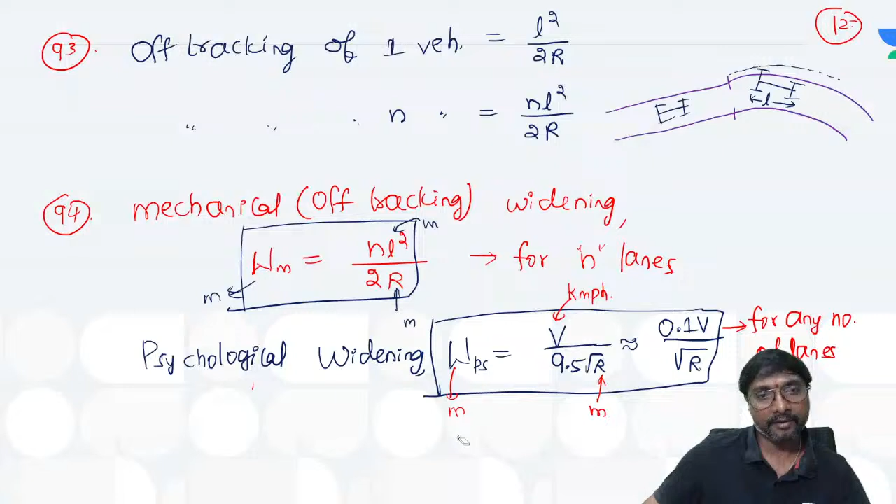Now what is the total extra widening? It will be equal to mechanical widening plus psychological widening. So mechanical widening plus psychological widening gives the total, or simply we will write it as We.

Where has it gone, white color came, one sec.

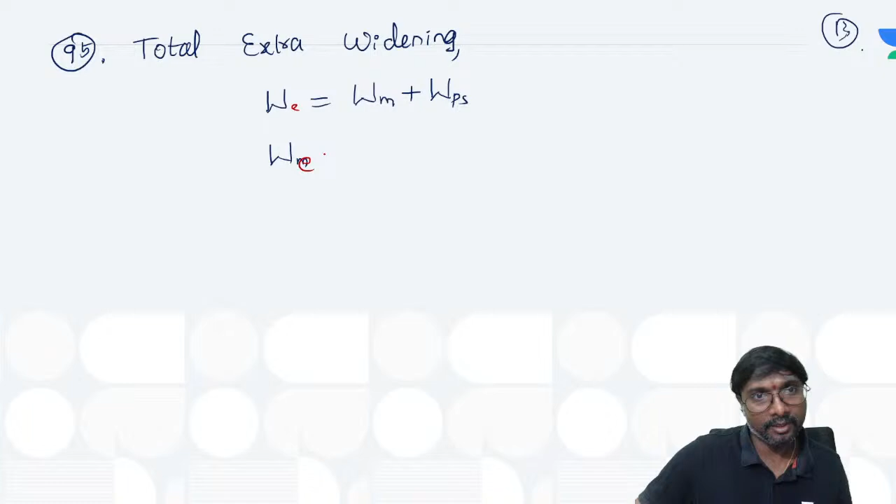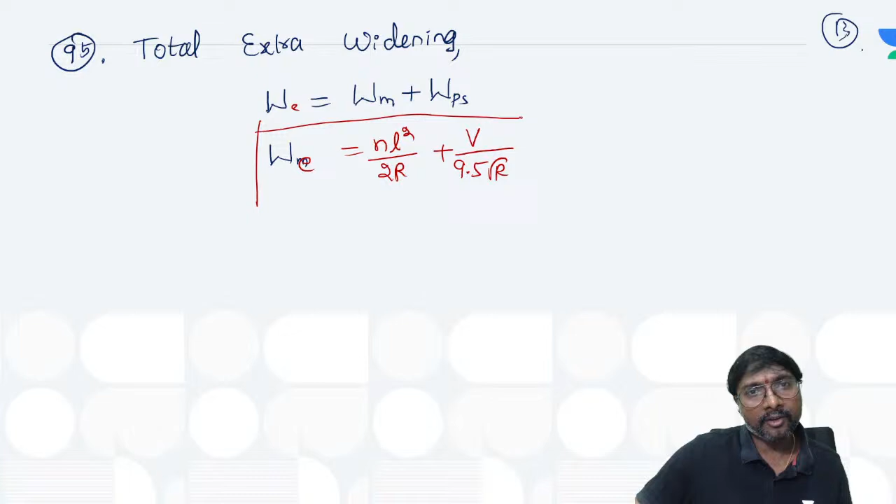So what will We be equal to? Mechanical widening is nL square by 2R, plus capital V by 9.5 root R. Both together we will be adding. Yes or no?

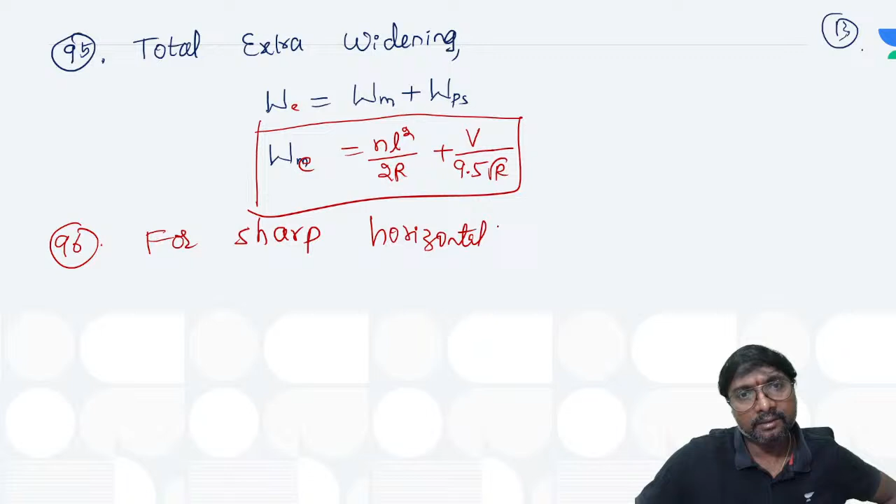Now, whenever it is a sharp horizontal curve, what do we need to consider? For sharp horizontal curves with the radius less than or equal to 50 meters, where do we have to provide the entire extra width? The entire extra width should be provided on the inner edge side.

So here it is like this. This is your original width, and the entire extra width we are supposed to provide on the inner edge side only. So on the horizontal curve we provide it on the inner edge like this. This extra portion is your We. Total width comes to W plus We.

W plus We we can represent as capital B. In case of sharp horizontal curves, the entire extra width is provided only on the inner edge side. So capital B will be equal to W plus We. Clear? Note this and tell me.

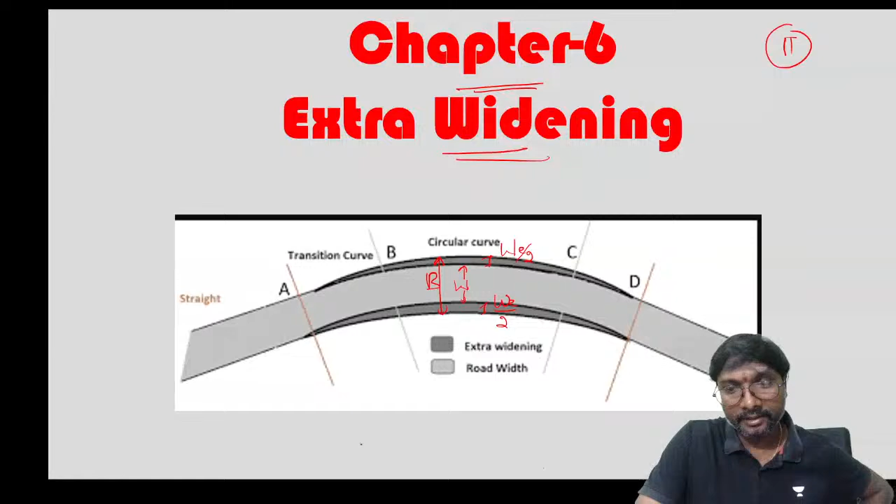What is that, extra widening, right? Which one will be equally distributed? This is equally distributed on which one - equally distributed on inner edge and outer edge, right? Like this diagram, inner edge and outer edge both will be distributing.

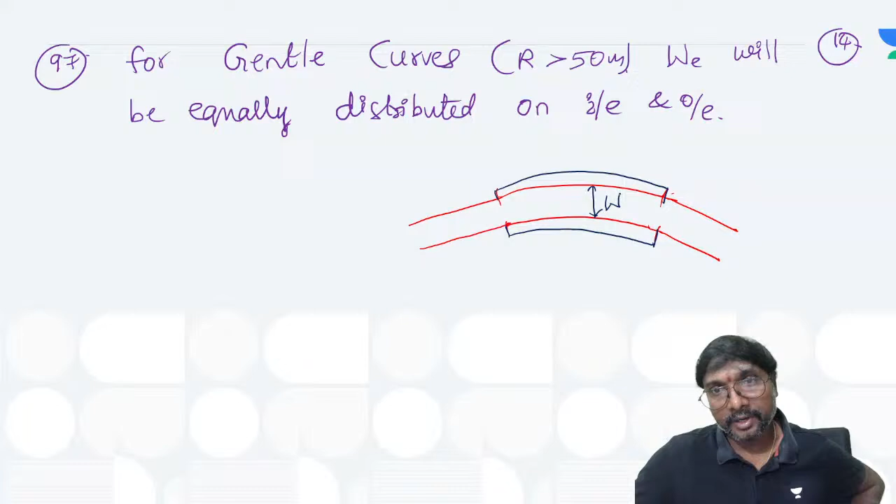What is this, right? This is your W, you can say. What is this one? This is your WE by 2. And what is this one? This is also your WE by 2. Now can you say what is the total width? If you just observe, the total width will be B. And what is the total width capital B? You can say that is your W plus this WE will be having, right? Like that, okay, clear?

Is it clear now? Now here extra width values as per IRC we'll write, and we'll write point. Then extra width will be over, we'll close after that, okay.

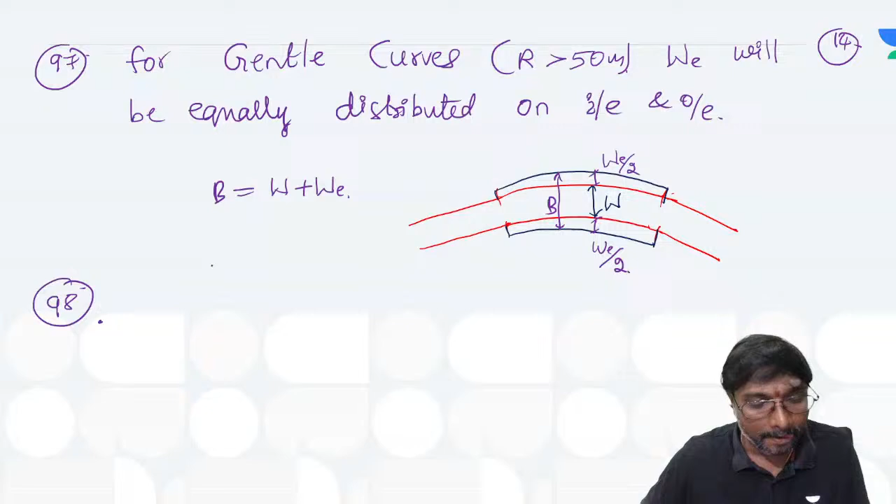As per IRC, what is that extra width values we have to provide? That is your radius in meters - lesser than or equal to 20 meters, 21 to 40 meters, next 41 to 60 meters, next 61 to 100 meters, next 101 to 300 meters, next greater than 300 meters. These are the different conditions we are having, right?

Now whenever it is for this single lane, okay, and whenever it is for this 2 lane, if you just observe what are the values. So this is your 0.9 meters, 1.5 meters, 0.6 meters, and same here 1.5 meters only. And again this is your 0.6 meters, and 1.2 meters.

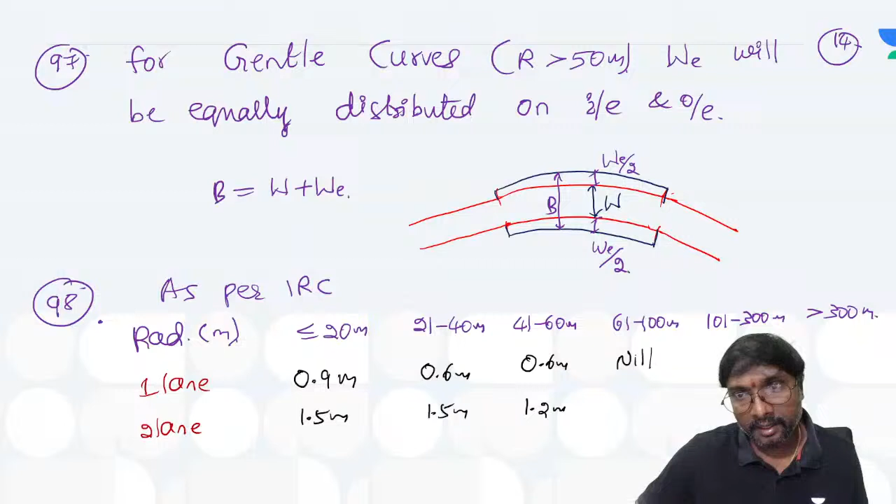So here nil, nil means for this single lane, when radius is greater than 60 meters, do you provide an extra width? No extra width will be provided, right? So this is your 0.9 meters, this is your 0.6 meters, and what is the considered - this is your nil, right? Means for a 2 lane, when radius is greater than 300 meters, don't provide. But for the single lane, when radius is greater than 60 meters itself, don't provide. Got it now? Clear?

So here, what is that, you can say - if you just observe this point, whenever it is for this single lane, radius greater than 60 meters now, no need to provide extra width, okay.

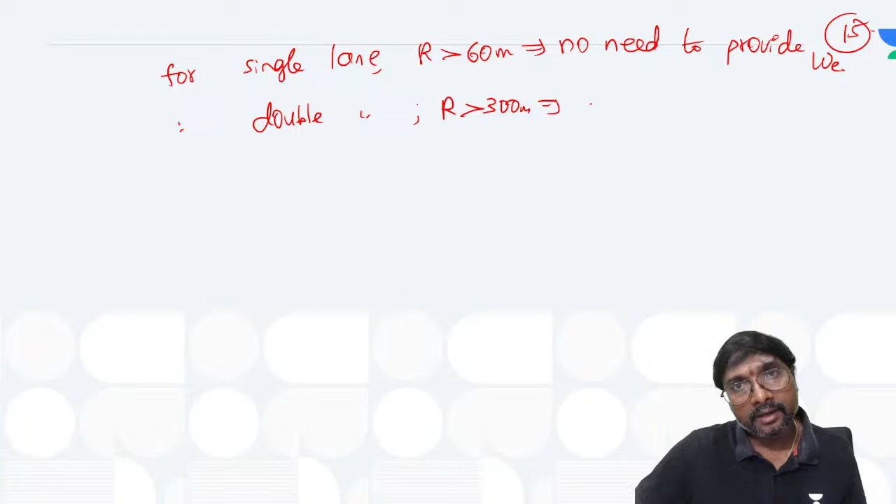And for this double lane, whenever it is a double lane, radius greater than 300 meters now, no need to provide this extra width, right? That is about your one, you can say. Clear now, everyone?

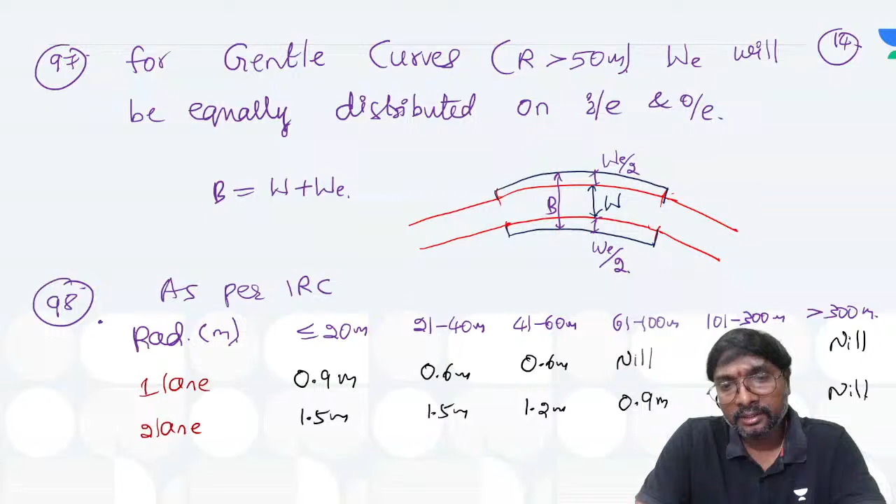I'll be closing the session now, and tomorrow what we'll be doing? Tomorrow we'll be doing at the same time - this curve resistance and transition curve. Which topics are left? You can say curve resistance will be there, setback distance will be there, transition curve will be there. So curve resistance and setback will complete, and transition curve we may start, we'll see. After all the geometric designs are over, again we'll be starting the live test.